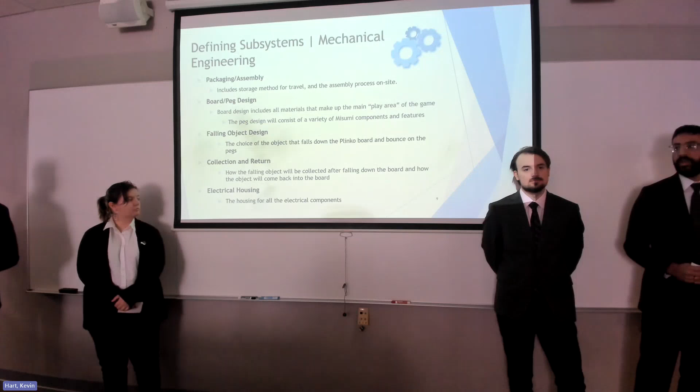The falling object design is essentially the choice of the falling object that is dropped along the Plinko board and bounces along the pegs. Collection and return is how the falling object will be collected after reaching the bottom of the board and how it will return back into the board for automatic play. And the electrical housing is just the housing for the electrical components that will be used.

Now, under the overall project objectives and constraints, there were several constraints that Misumi required of us, mainly being the project shall mainly comprise of Misumi components. Project shall not exceed spending limit of $2,000 for Misumi related components, and project shall not exceed spending limit of $1,000 for non-Misumi components. The project shall also include an automatic and manual game version. Project shall include a falling element dropped through a series of Misumi components.

Next, we formulated objectives and constraints pertaining to each specific subsystem. For UI, the design should have a switch to toggle the Plinko machine on and off. The design should have a button to switch from automatic to manual mode. The design should incorporate a screen to display helpful information to the user. The design shall not require more than 18 I/O pins. The design shall not draw more than 0.5 amps while in operation, and the design shall be readable from a

distance of 10 feet. Moving on to the audio-visual subsystem, the design should react to stimulus from the user and the falling object. The design should incorporate multiple different colors, and the design should clearly indicate which basket the object lands in while in manual mode. The design shall not draw more than 2 amps at full brightness. The LED should be capable of displaying full RGB color, and the design shall not produce more than 1,000 lumens or 80 decibels, because that would be a little annoying.

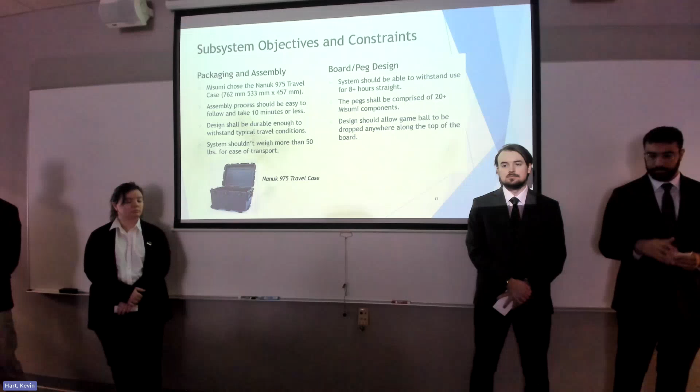Now moving on to the objectives and constraints for my subsystems. First off, we've got packaging and assembly. Misumi chose the Nanuk 975 travel case with the dimensions listed on the screen. You can also see the picture down below. The assembly process should be easy to follow and should take no more than 10 minutes. The design shall be durable enough to withstand typical travel conditions while in the travel case, and the system should not weigh more than 50 pounds for ease of travel.

Now moving on to the board and peg design. The system should be able to withstand use for 8 or more hours straight, simulating what a trade show or convention would be like. The pegs shall be comprised of 20 or more Misumi components, and the design should allow the game ball to be dropped from anywhere along the top of the board, providing a more immersive user experience.

For objectives and constraints for my subsystems, the falling object should weigh less than 0.5 pounds, should have a volume of less than 5 cubic inches, withstand an impact of 0.2 foot-pounds, shall include the Misumi logo, and shall fit into the collection and return system.

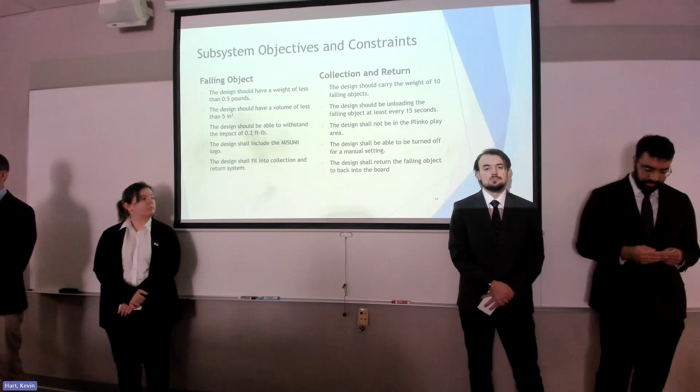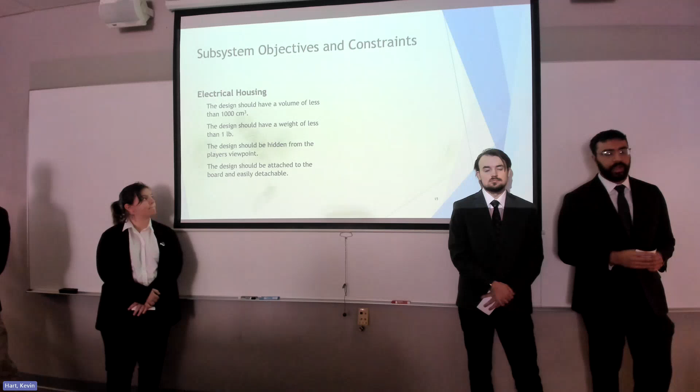For the collection and return, it should be able to carry the weight of 10 falling objects, should be unloading an object every 15 seconds or so, shall not be in the Plinko play area, shall be able to be turned off for a manual setting, and shall return the object back into the Plinko board. For the electrical housing, it should have a volume less than 1,000 cubic centimeters, weigh less than 1 pound, be hidden from the player's viewpoint, be attached to the board, and should be easily detachable.

So now we have some objectives and constraints set up, we can find some initial design concepts. Initial design concepts for the display focused on readability, character size, power consumption, and cost. Three main solutions were considered here: the Hub 75 LED matrix, a Focus LCD panel, or a 14-segment display from Cirqua in an array. As for buttons and switches, the focus was appearance, reliability, and cost.

Visual design concepts valued customizability, brightness, and power consumption, which led us to the Fit 0810 LED strip, single color, the NeoPixel LED strip, which is RGB and fully programmable, and the NE-IL IO signal beacon. And this beacon is really nice because it actually offers different colors and sounds, which is kind of a consolidation of both audio and visual.

Moving on to down selection, we decided to go with the Hub 75 RGB LED matrix because it was the most customizable by far, and it was able to be sourced cheaply from MSOE Tech Support at a discount. The LCD panel was eliminated because it just wasn't a good display. You couldn't see it from good angles and it wasn't very bright.

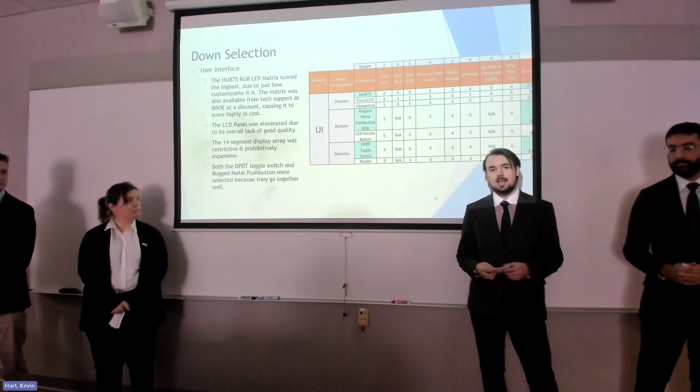And the 14-segment display was prohibitively expensive and also restricts the total number of characters and types of characters you can display. The DPDT toggle switch and rugged metal push button were selected together because they go together well and their metal fabrication makes them reliable and durable.

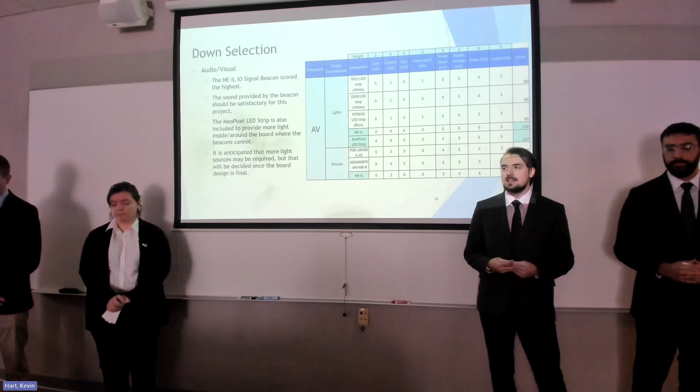Onto the audio visual down selection, we decided on going with the NE-IL IO signal beacon as the aforementioned combination of the audio portion, the buzzer, and the visual portion of the actual light up beacon. It was just really nice. And those would be kind of outside of the board. So I also went with the NeoPixel LED strip to kind of give light around and inside the board as well.

Moving on to electrical hardware, Misumi sold sensors took priority over other brands. Preferably, the sensors should sense when and where an object moves past them or be small enough to be placed in each well. The microcontrollers considered were based on cost, familiarity of coding environment, memory storage, and the amount of GPIO pins. As for power, the input will be 120 volt AC as a baseline, stepped down to at least 3.3 volts and 5 volts for peripheral microcontrollers, and it must be reliable, no voltage drop or current drop.

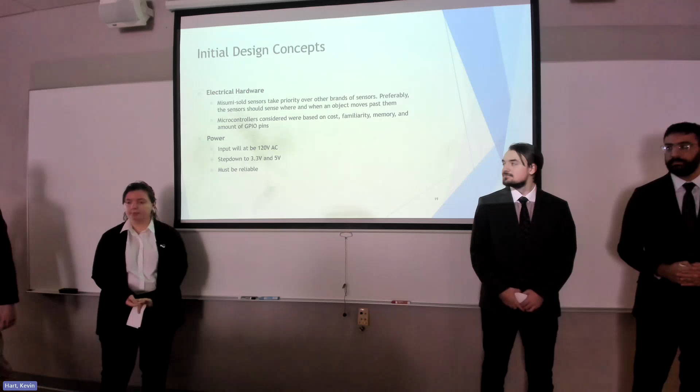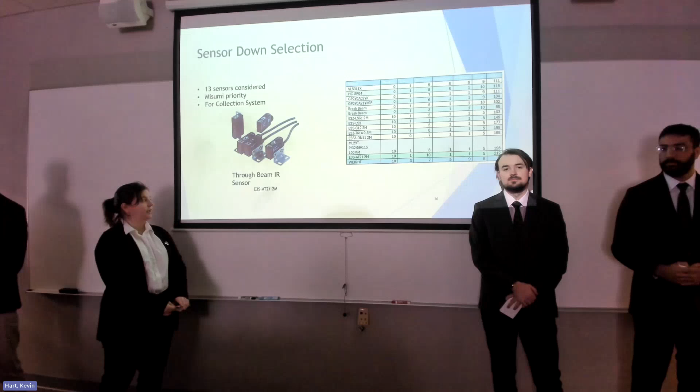As for the sensor down selection, 13 sensors were considered, 6 of which were non-Misumi and 7 of which were. Misumi took priority as they are our sponsor, and this was specifically for the collection system. And at the end, the through beam IR sensor was chosen for this project.

As for the microcontroller down selection, 3 major microcontrollers were considered. We have Raspberry Pi 4 Model B as our winner, given its customizability, the room for growth, and it has multi-cores. It also has access to RGB matrix hat and RTC, so it provides power and configuration for the RGB LED matrix display that we have already chosen.

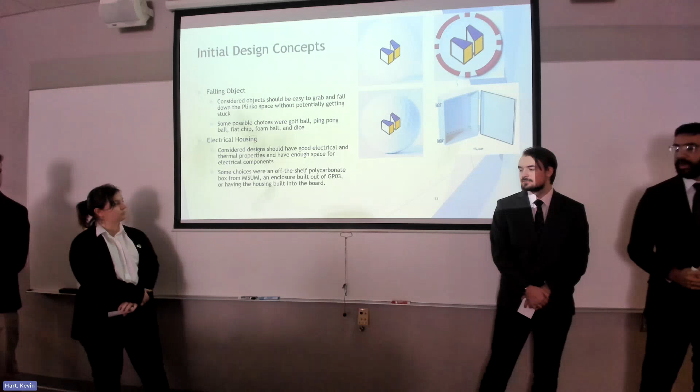For initial design concepts of the falling object, it needs to be easily grabbable, and it should fall down the Plinko board without potentially getting stuck. Some choices were a golf ball, ping pong ball, a flat chip, a foam ball, and the dice. For electrical housing, it should have good electrical and thermal properties, and have enough space for the electrical components to fit in. Some of the choices were an off-the-shelf polycarbonate box from Misumi, a GPO3 housing, and building the electrical housing into the board itself.

So for the falling object design down selection, the weight, durability, size, customization, cost, coefficient of restitution, and the ease of return were considered. The golf ball ended up winning because it's durable, so it won't be damaged by the pegs when it's falling down. Ease of return, because the spherical shape makes it easy for collection and return. And coefficient of restitution makes the golf ball a good bouncing candidate for a good enjoyable Plinko game.

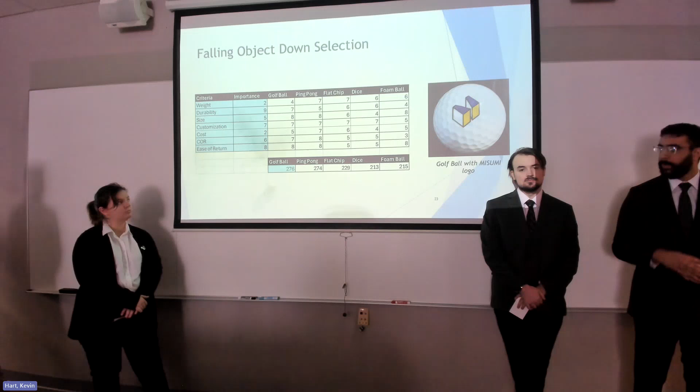For electrical housing, considerations were cost, machining, use of Misumi components, thermal and electrical properties. The polycarbonate plastic box from Misumi ended up winning because it is from Misumi, our sponsor, and it has good electrical and thermal properties. And it's already off the shelf, so that makes it a good choice.

For the initial design concepts of collection and return, it needs to be something that can put a falling object back into the Plinko board with good upward motion. So some of the initial concepts were a flat belt elevator, a chain elevator, and the Archimedes screw.

So some of the considerations were cost, space, ease of build, connection to a lifting element, and the speed that's available. So the chain elevator ended up winning because it has good speed available from the motor, and the connection to a lifting element is fairly easy because of the connecting link with brackets that can attach a lifting element to it, and it's fairly easy to build. So the chain elevator is the one we went for.

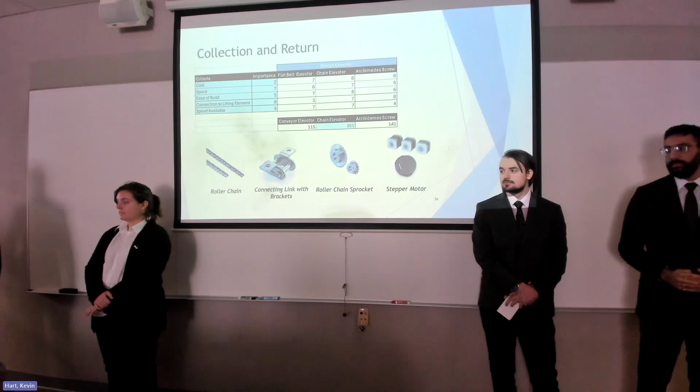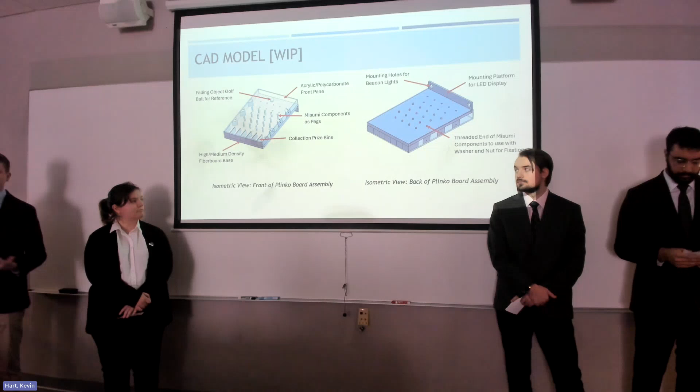Now moving over to the right side, you can see the back of the Plinko board. On the top there, you can see we've got a mounting platform for the LED display. You've also got some holes in it, which will be able to mount those beacon lights. And you might also be able to see that the threaded end of the Misumi components stick through the back of the board. This will be used as the main fixation device since we will use that with a washer and a nut to secure the components onto the board.

The CAD model for the lifting assembly and housing is mainly contained on the back of the board. For the collection system, there will be a ramp at the bottom of the Plinko board that'll be rolling golf balls into a collection area for holding. The return system includes a stepper motor that'll attach to a roller chain sprocket. The roller chain will be wrapped around it and also around an idler sprocket above.

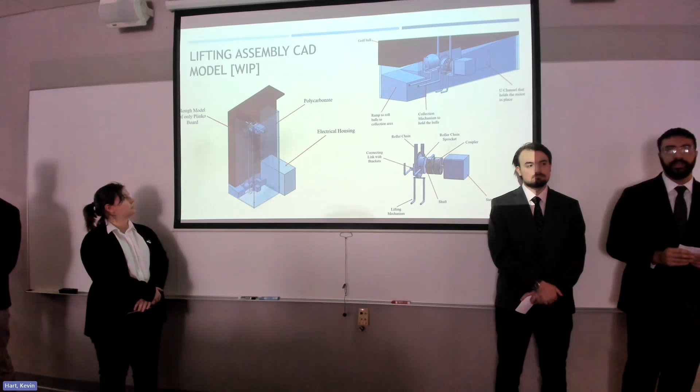And as the motor rotates, throughout the chain, there's connecting links and a lifting element. Then as the chain rotates, the lifting element will pass through the collection area to lift the golf ball up and eventually drop the golf ball into a ramp that'll lead into the Plinko board.

So now for some of the future CAD progress that I was mentioning earlier, we need to combine that main Plinko board model with the collection and return model, which will give us a good overview of the entire system. We also need to configure the arrangement for the IR sensors since they're just kind of thrown in there at the moment, which will likely require blocking off a collection bin or two to be able to fit these sensors into the board. We also need to add the audio and visual components, such as the light beacons and the speakers.

Aside from the mechanical components for this project, we will also be working in a simulation environment so we can code the IR sensors, the audio-visual components, and the user interface. We will be working on the Raspberry Pi 4B, which is a fully fledged computer, and two IDEs are already installed. We have Python Thonny and C++ Geany. This is going to be our language of choice, as embedded C is what we are taught here at SOE.

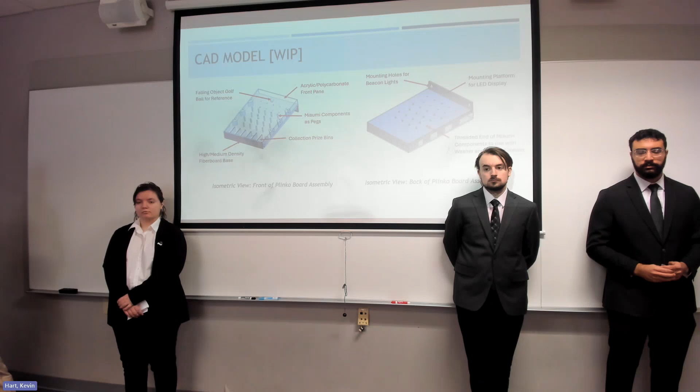Okay, we've got to move on to the next talk. Let's thank this group. Good job, guys. We have another Misumi talk.

Got it. Okay, so we've got one more talk, Misumi Fun Games. This one is a pinball machine. So go ahead, take it away, guys. 20 minutes of talk and 5 minutes Q&A. So this is going to be our design of a Misumi pinball machine. I'm Riley. I'm Luke. I'm Sam Last. I'm Samuel Bone. And then I'm Scott.

So for the project proposal and constraints, we were tasked with designing and building a tabletop trade show demonstration unit that utilizes both motion and a large number of Misumi components to catch the eye of trade show attendees. A couple different constraints that we had: originally, the size envelope was going to be 600 by 350 by 300 millimeters, but that was changed to fit into a Nanuk 975 travel case, which is 762 by 533 by 457 millimeters. For power, it was going to be a 120 volt standard AC outlet or battery power which lasts up to 8 hours.

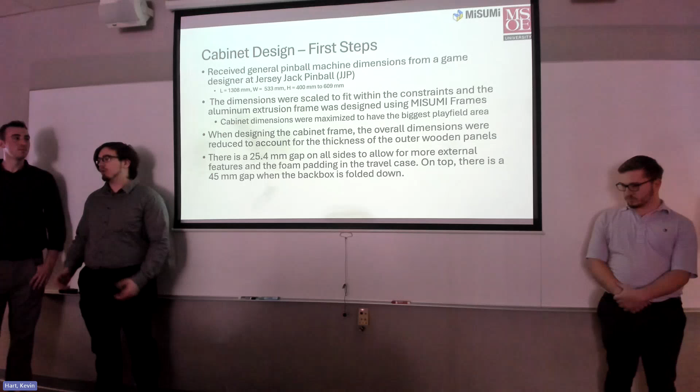So for our first steps in our cabinet design, we actually got our general pinball dimensions, our usual pinball machine, from our industry contact at Jersey Jack Pinball. And then we scaled those dimensions down to fit within the constraints that we had. And we also maximized those dimensions. We want to maximize the playfield dimensions to have the most fun that we can get out of the machine.

And when we were maximizing those dimensions, we accounted for the wooden panels on the side and then left about an inch gap or 25.4 millimeters on all sides and a little bit more on the top so that we can have room for any external features and for any foam packing inside of the travel case.

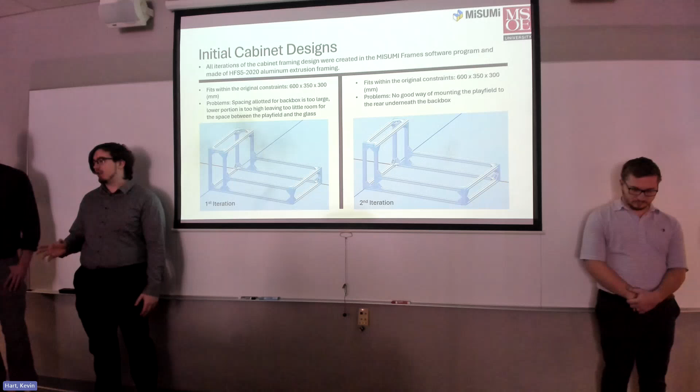So for our first cabinet design for the framing, we used the Misumi frame software. We used their HFS5 2020 extrusion framing. It's 20 millimeters by 20 millimeters. Our original design, the height here was a little bit too tall. It didn't leave enough room for the playfield. The playfield would stretch from there to there about, and the height we would get for the playfield was too short, so we needed to lower that.

And then the width of the back box is actually on a slant as it goes down. It's kind of a trapezoid shape. And this original dimension was scaled from a real back box, but that was off of the top dimension. So this was too long and it actually ended up being short. So for our second iteration, we shortened both of those dimensions so that would work out.

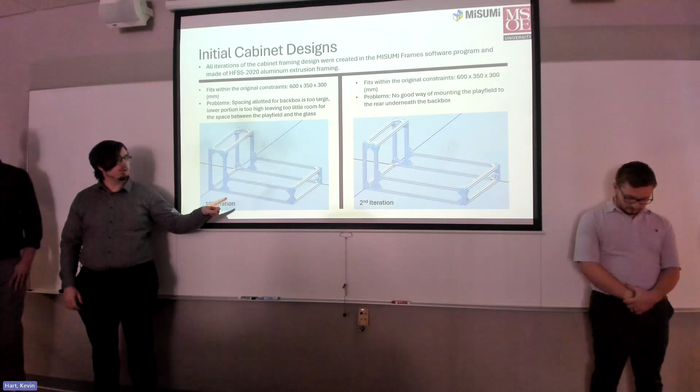And then for our third and final iteration of the framing, we removed 2 posts so that we could extend the playfield longer, we get a couple more inches of the playfield, so it goes beneath the back box. And then we added a bar in the back for ease of mounting the playfield onto the frame.

We then exported the framing into SolidWorks and we added the wood panels, we added the hinges. The back box rotates off of this. That's in the open position. There's a cam lock in the back that holds it in the open position. And we added the metal side trim here, which will screw on.

And we have the playfield glass, and there's actually plastic trim in there, which is what the playfield glass is actually touching, so it does not get scratched. And then the apron will be added and a lock bar at the bottom to hold the playfield glass in, and those will be fairly easily removable if you ever need to take out the playfield glass.

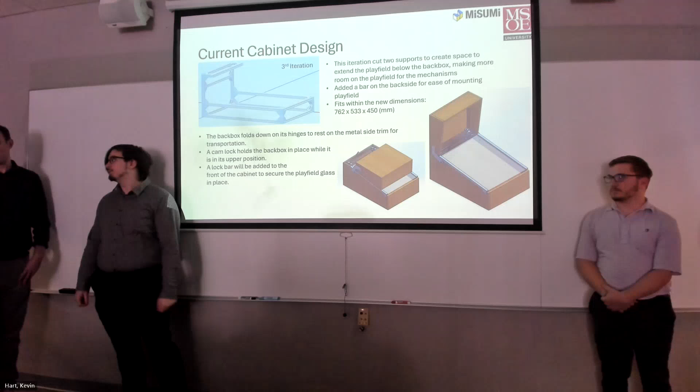And then for our custom parts, we use Meviy through Misumi. You can just upload a CAD model, and those parts can be made through processes such as CNC milling or modifying the sheet metal. Those parts that we're making through Meviy are going to be the hinges, the side trim, and the lock bar once it's designed, and then the ramp structure for the playfield, and then the apron.

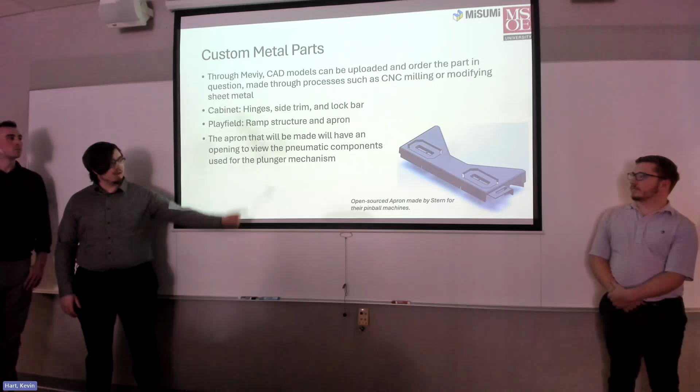The apron, once we design it, will have an opening so that we can view the pneumatic components for the plunger mechanism to launch the ball. And then that is an open sourced apron just as a reference picture.

So during the cabinet design, we're also thinking about playfield design and what kind of theme we want for the game. So we decided to go with an MSOE theme focused on Roscoe Raider. So because of the connection with MSOE, we got in contact with marketing to make sure that the game meets what MSOE wants, and also get creative help with the artwork for the cabinet and the playfield.

And one of the requirements that the creative director gave us was to connect each major component that we had previously selected back into the theme. So the theme starts with the player who finds themselves out at sea when they come across Roscoe Raider and a ship full of treasure.

And then after the ship is sunk, the goal for the players is to collect as much of Roscoe's treasure and his materials as they can. And in order to do that, they have a 3-minute time limit, because that's the amount of oxygen that they have. And at the end of the 3 minutes, they need to either return to the surface or they'll drown.

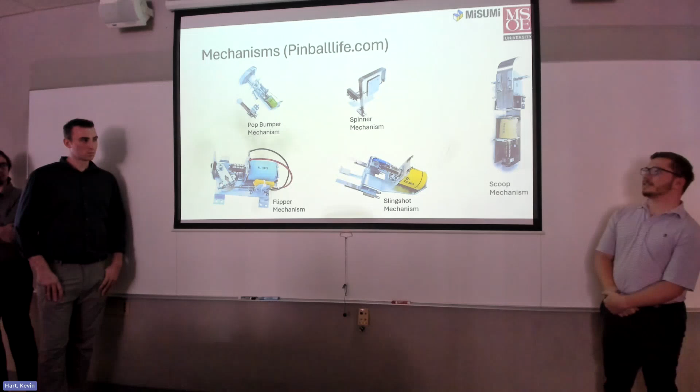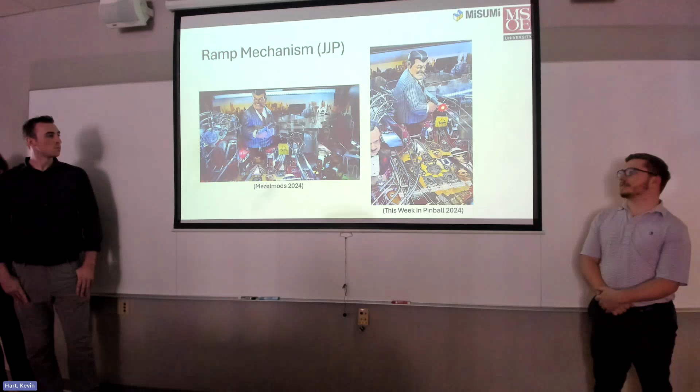And then the ramp mechanism we bought from Jersey Jack Pinball. You can see it here featured in The Godfather. On the left, in the circle, you can see the ramp when it's in the down position, and on the right, you can see when it's up. So when it's up, it allows for the ball to travel underneath the ramp, and it also allows for another path to a wire or return ramp.

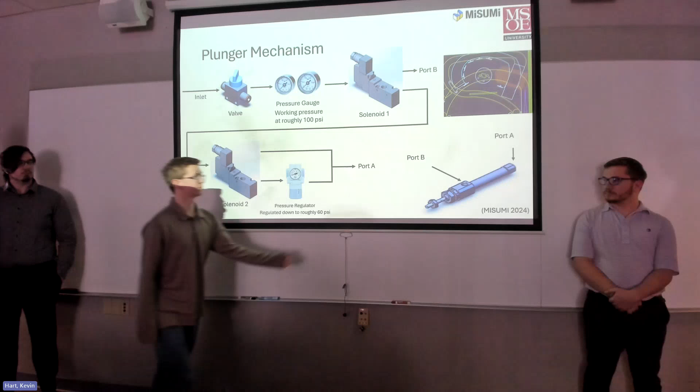All right, for the plunger mechanism, we're planning to use a pneumatic piston to shoot the ball out. So we're starting off with a solenoid just to actuate the pneumatic piston, and then we're also going to use another solenoid to regulate the pressure. So it'll have two different shots with this solenoid. One, when the ramp's down at the beginning of the game, the ball will just fall down. And when the ramp is up for a multi-ball, we'll use the higher pressure to make sure that the pinball can make it all the way around the ring.

And then there's the rest of the diagram, the piston that we plan to use. Here's the calculations that we used to get the volume of the piston. This is what we used to get the volume of the tank that we need and how long the compressor is going to have to run for.

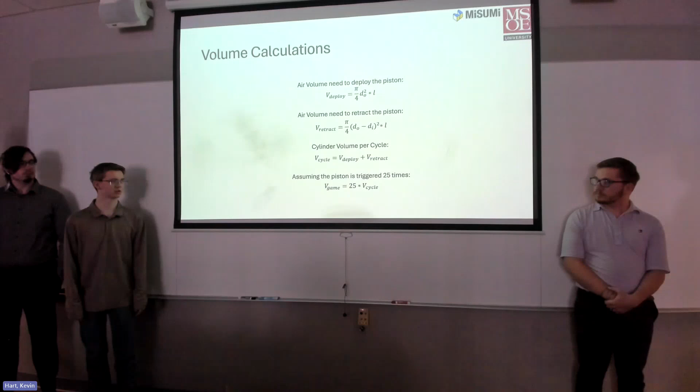Then here's a linear actuator or lead screw that we're using to move the Roscoe Raider back and forth. We're working with marketing to get that figurine that we're going to use. And it'll just move back and forth there.

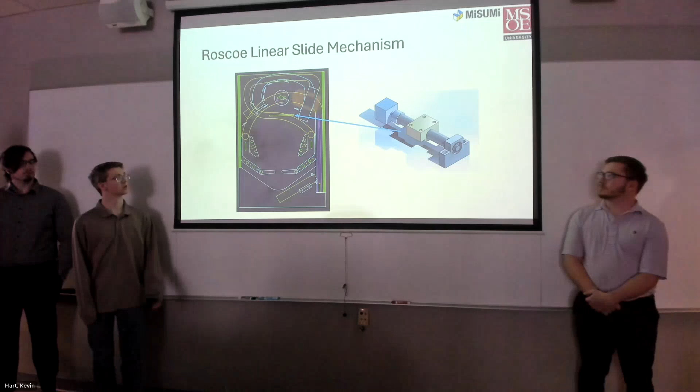So then for the hardware circuitry design, we have just a couple of main requirements that we want. So first, we need some sort of controller board to interface with all the peripherals, which we are going to be choosing. We'll go forward with that. And we're also going to need some driver boards that control high voltage components.

And then to fit with one of the constraints that Misumi gave us, we need a power supply that runs off a 120 volt AC standard wall outlet, which for our case, we're going to be choosing a 48 volt power supply from Misumi to utilize all the high voltage components, because the flippers and the slingshots all have a maximum voltage rating of 50 volts. So that's as close as we're getting to that.

And then additionally, we wanted to have some sort of main programming language that we teach at MSOE, so either embedded C or C++ or Python. So there were two different choices that we were going with. First, an Arduino microcontroller with additional circuitry, or the FAST pinball architecture.

So some of the pros between those two: for the FAST architecture, it has good documentation across all of its website with wiring together components and coding together. And it's widely used across homebrew pinball machines, so there's tons of tutorials available online on YouTube or websites.

And it essentially has a plug and code kind of mentality where all the driver boards and circuitry are already designed for you, and you just have to plug it in, and basically you just code all of the different aspects of it, which makes it easier for driving those higher voltage MOSFET switches.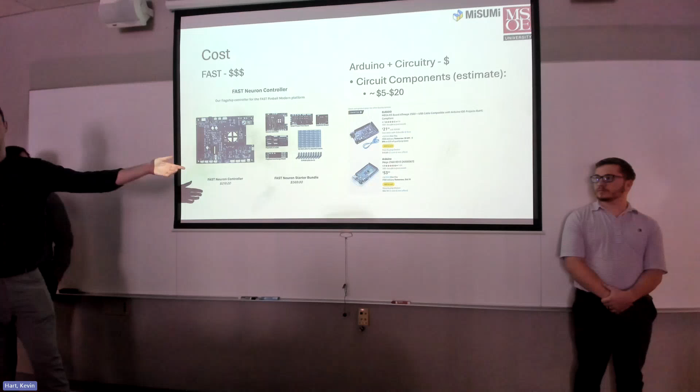So here we can see a little bit of the cost. As you can see, the FAST is almost $600 for everything that we would need. Whereas with an Arduino, if we build our own PCB, you can get an Arduino for around $50 off Amazon, and circuit components could be anywhere between $5 to $20. So we decided to go with the Arduino and circuitry.

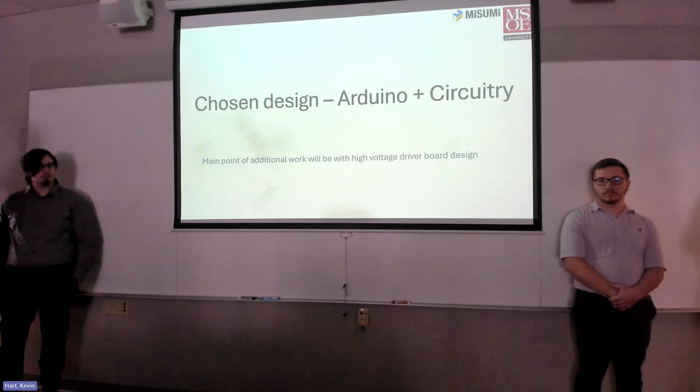So for the MOSFET component selection in that future PCB board, we will need a voltage rating of greater than 48 volts to accommodate the power supply. And we also wanted a current rating of around 12 amps, because we measured the resistance of some of those mechanisms as around 4 ohms, which I don't think is going to be accurate, because from outside research, most pinball machines only draw between 2.5 to 3 amps.

So I definitely need to test that going forward when we actually receive the power supply to see how much current it really will draw. But just to make sure there are no issues with that, I selected a MOSFET that has a maximum current of 30 amps, so it should be totally fine in that regard.

And it also has a drain to source voltage maximum of 75 volts, which is almost double what we really need. And then the gate driving voltage is 4.5 volts, and the Arduino that we're going to be using, the Arduino Mega, has a driving voltage of either 3.3 or 5 volts. So if anything, we could just add a resistor to slightly decrease that gate voltage. So there's 2 devices.

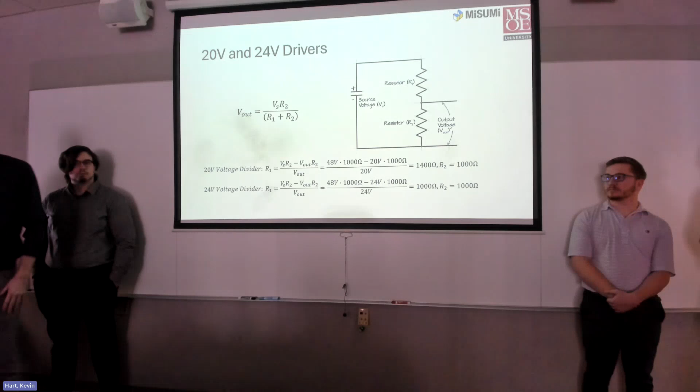Now going into the software section for our pinball machine. It'll be a C-based state machine that is interrupt driven, and it's going to be simplistic for speed, since our game is highly dependent on timing for our board components. It's going to be predictable for the player.

So we start out with the initial setup to initialize all board components, and then transition to the idle state to wait for the player to start the game, where all sensors and components are locked, so no interrupt scoring or unwanted actions occur before starting. And then once the player starts the game, it'll start the main game loop and the start timer of 3 minutes. And in the game loop, it'll allow interrupts to be fired.

And once an interrupt is fired, it'll perform a game function related to the sensors or other game components. And it'll update the score if need be, or reset the game object as need be. And after that, it'll clear any interrupt flags and transition back into the game loop. And after the 3-minute timer is up, it'll go into the end game to display the final scoring.

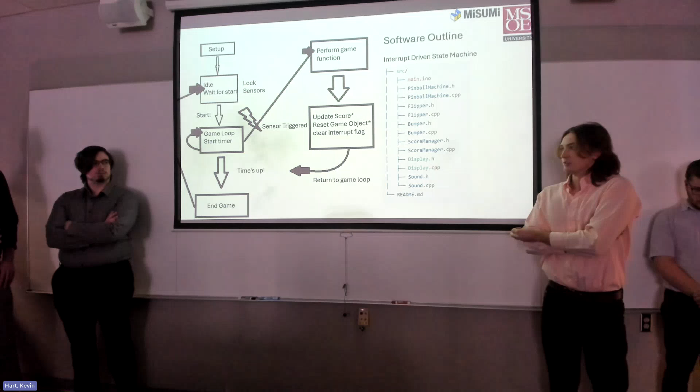In our main program loop, the timer is displayed on a 7-segment display for the player, and the light show on the game board will be influenced by game operations to communicate to the player how their game's going, along with sound effects to communicate game status to the player, or based on timing or game actions to further engage the player. Sound effects will also communicate by relaying feedback to know main objectives in the game and which are good and bad.

Scoring will be a volatile global variable in memory, since it'll be changing a lot, and we can add safety to that so scoring does not get corrupted. It'll be updated through interrupts. Interrupts are good for our C-based programming, because they're very fast and won't heavily impact timing on our game board. And it'll be displayed for the player through a 7-segment display, and be very simplistic and interpretive for the player to know how to play and how their game is going if they've never played pinball before.

So going forward and kind of summarizing what we've done so far. This first semester, we had initial brainstorming of the playfield and the cabinet designs. Then we went about designing the cabinet and the playfield. And then a lot of that finished out with determining the main playfield components and component selection and such.

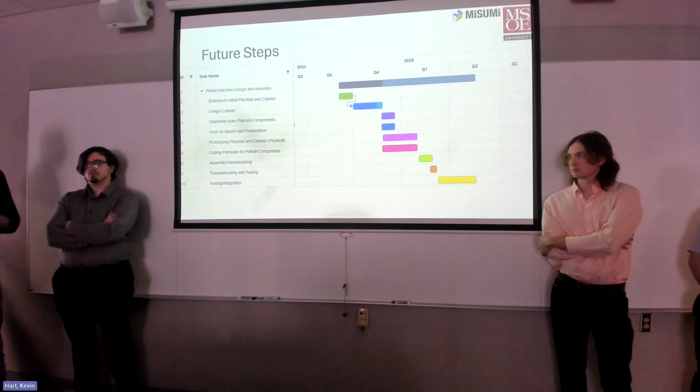And then during play testing, we'll have a variety of people with different skills play the game to determine how often the pneumatics are driven, to see how big the tank needs to be, and to also check for wear and any other bugs that we didn't account for in the initial design.

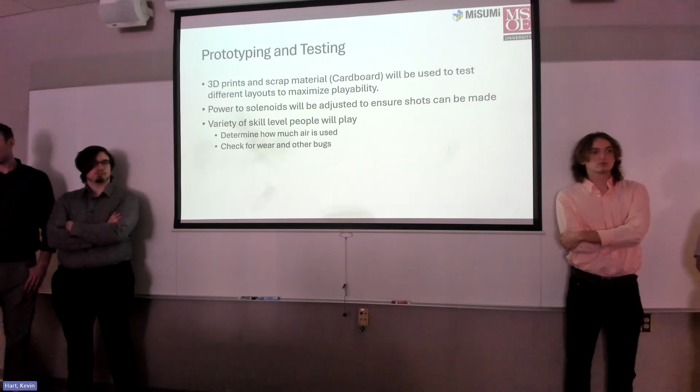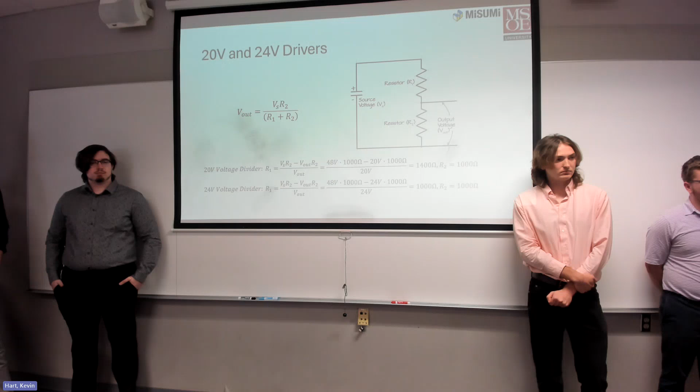And then the selection for the flippers, I wasn't sure I understood. So you picked that specific one because it could move any size pinball. Is that what you're saying, Gary? Yeah, so the solenoid on that has more power, so it rotates faster, right? Did you compare that to a pneumatic version at all, or not?

So you have some pneumatic components that are in this, yes? Yeah. So you're talking about some compressed air, right? Like using some of these. So how are you recharging that compressed air? Where are you getting your air from? We'll probably have an outboard compressor. Misumi probably provides. Okay. Yeah, they could have some. We're still in the works on where the tank is gonna go and what the compressor's gonna be. Is that common for pinball machines to have that? No, we're just gonna use as many Misumi parts as possible, that's our way to do it.

Cause I was thinking about this, I don't remember playing pinball and then all of a sudden hearing some compressor come on. This was one of the easiest ways to add more Misumi. As far as I know, there's not been a home brew pinball machine that uses pneumatics or anything. It's all electrical solenoids.

So the most up-to-date cab model, is that the one that you showed with the fold down situation? Is there a display on the top side and is there wiring going to that? How does the wiring work when you fold it down? There will be a display on the top part of the back box. So in the back box will be the display we mounted, and then there will be a plastic piece that locks in that shows more artwork.

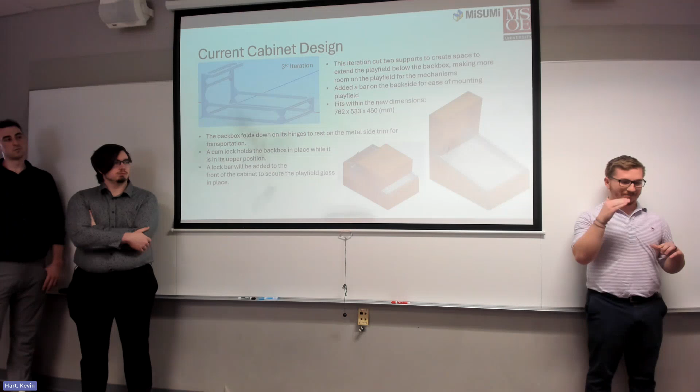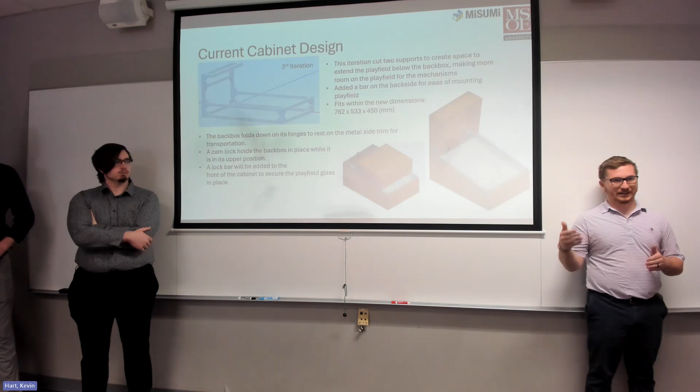Yeah. How do we communicate that story across without having a full page storyboard to go with it? Normally on a lot of games, on the apron down in the corner, they have just a little plaque with the main rule steps. And on that we probably wouldn't put as much detail as I put into it here. It would just be like light MSOE to qualify multiball, hit that. I'd encourage you to think about how we streamline that for consumers that are not familiar with it. Yeah, I could have made the whole playfield layout a lot more complicated, but it's already pretty complicated. I think you're plenty complicated.

All right, we gotta move on. Thanks, guys. Thanks, last, not least. Yeah, Ivan's, I think, one of the committee members here. Yeah. No, you're fine. No problem. No, thank you. Hey, you guys ready? Oh, sorry, come on in.

Okay, last talk in this session is kind of an educational talk, Stem to Stern. So 20 minutes of the talk, and then Q&A. Go ahead, guys. Today we're going to talk about the Stem to Stern teaching technology project brought to you by Dan Gonzalez.

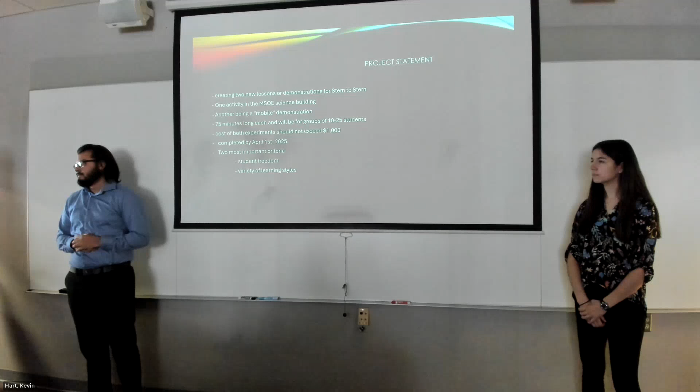All right, so now we're going to go into some background research. We're going to talk about what Stem to Stern is, the current state of the program, some learning styles and general learning concepts, and then some other psychological concepts that we want to try to integrate.

So what is Stem to Stern? Stem to Stern is an educational program created by Rachel Hunter and Will Bott to provide a STEM education and rowing experience to underprivileged children. There's over 20 different locations that serve kids from middle school to late high school. Here at MSOE, it takes place in the STEM Center, and we teach middle school students. They do sessions once per week for 6 weeks, and they have 3 of those blocks per year.

Before the lesson, it takes about 45 minutes. They have a snack, do an icebreaker, try to release some tension because it's an after-school program. Then they go on to a lesson, and then an activity. The lessons take 10 to 20 minutes. It can't be too long because the children get a little rambunctious; they have high energy. The activity afterwards is more geared towards design and supplements the lesson. The kids ask lots of questions during the lesson, at least from what we saw. They're pretty engaged, and the lesson should be informal, engaging with the students. It's a definite benefit.

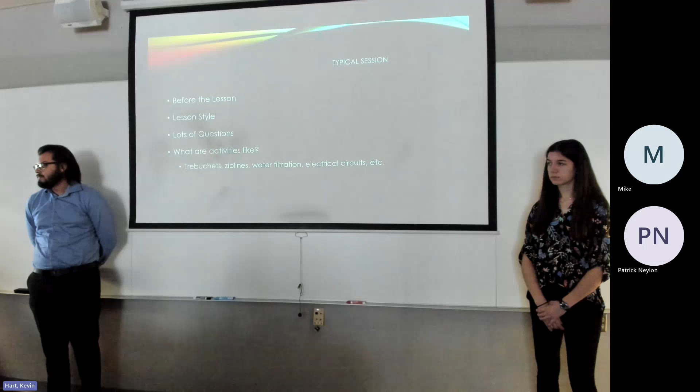So most of our learning research was geared towards the lesson design rather than the activity design, but we did incorporate some of these concepts into our criteria. So the first one was learning styles. That's just where we started because that's the first thing we thought of. Learning style is just the type of information you'd like to learn from. There's 3 types: visual, auditory, and kinesthetic. Those are the 3 at least we focused on, and we found pretty quickly that there's no model that can predict what kind of learning style someone has, because it's purely preference based.

So going along with that, tailoring a lesson to someone's learning style doesn't actually help them learn it any better, contrary to common belief. Instead, having all 3 of them in a lesson or tailoring the learning method or the learning style to the actual content is more important than tailoring the learning style to the person.

Cognitive styles are a bit different. They're more about the inner workings of a person. They are about how a person thinks, solves problems, and remembers information. They can be predicted using models, empirical models, and tailoring the lesson to someone's cognitive style does improve learning. So the difference between them is that learning style is more about how information is presented, and cognitive style is more about the inner workings of the mind.

Next, we looked into cognitive loading, which is the total effort taken by the brain to learn something new. There's 3 different types. There's intrinsic, which has to do with bridging the gap between previously known information and the new information. There's extraneous, which has to do with discerning which information is important. And then the third one is germane, which is most associated with learning achievement. The higher the germane load is, the more of an achievement there is. So add them all together, you have your total cognitive load, and try to keep it kind of low because everybody's kind of got a threshold.

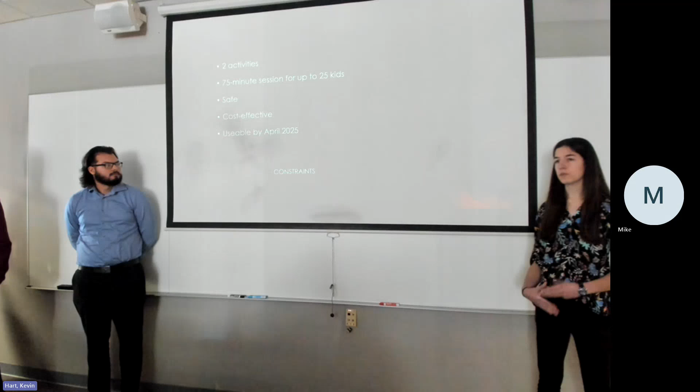So starting with the constraints, you can see them outlined here. Our objective was to create 2 activities for the students, one taking place in an MSOE lab to expose them to that kind of environment, and then one that will be transportable or mobile, as there's over 20 locations nationally, so that they could take this to a different Stem to Stern location. Next, each session we have 75 minutes with the students, and we're planning for up to 25 students. So that plays more into our budget because we want to maximize the interaction each student can have with the activity.

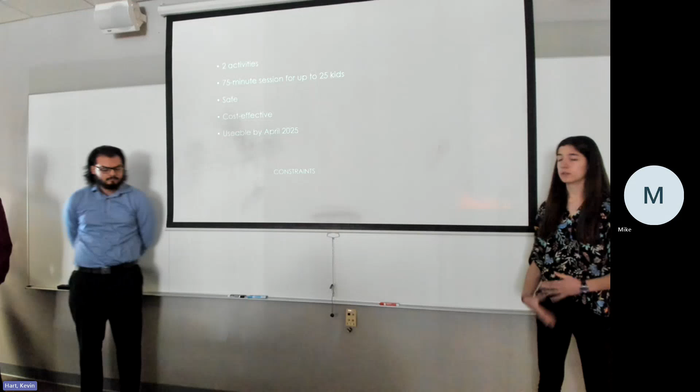Next, and most importantly, safety is a top priority for us. We're going to introduce any necessary lab protocol to the students, along with design experiments with safety built into them. Continuing, our experiments should be cost effective. We have a budget of $1,000, which is kind of flexible, but ideally we'd like to stay under that. And then finally, both experiments should be usable by the beginning of April, as that's when the session with the students will actually take place.

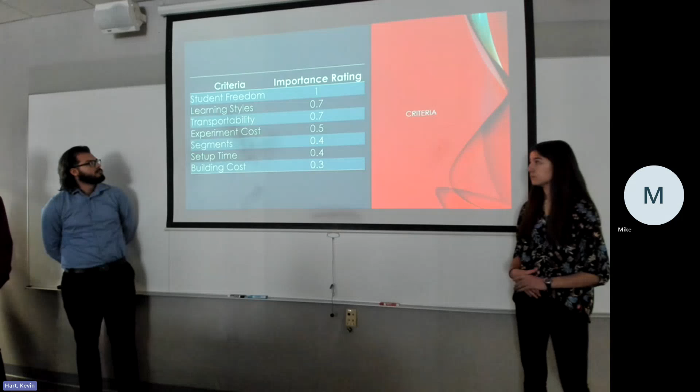And next, you can see our criteria outlined, comparing importance relatively among them. First of all, student freedom has the most importance as our experiments are focused on students. This is supported by the metacognitive scaffolding that we discussed earlier. And we want to make sure that students can take ownership and experiment with the different activities so that they can learn through doing. Next, we have learning styles. There's over 30 out there, but we focused on auditory, visual, and kinesthetic, which we hope to include all pretty equally so that every student feels engaged. And we thought that was really important.

Next, transportability, that's the mobile aspect, which was also fairly important as Stem to Stern requested that, and we thought it was something nice that we could do. Continuing, experiment cost was moderately important. This is the cost that Stem to Stern will have to pay out of budget to run the experiment every time. So we have to account for any components that might be broken on accident or on purpose. So we would like to minimize that.

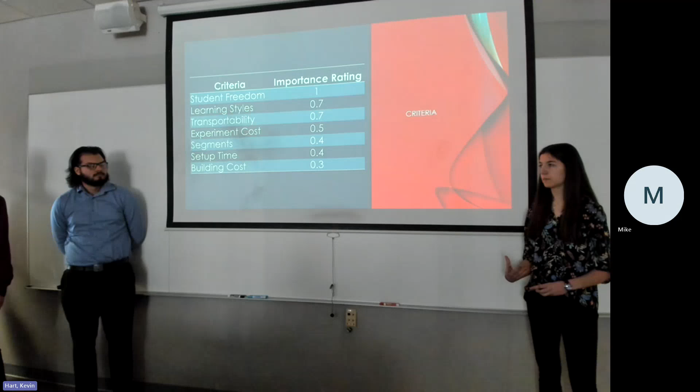Just continuing, segments: this is how each session will kind of be structured. We want to include theory, video, building, measure, and analysis segments. The theory will kind of introduce any equations and calculations that are prerequisite for the activity. And the video will kind of supplement that too. And then the building segment will take the longest amount of time. It'll be very hands-on, to try and keep the students engaged. And then the measure and analysis segments will kind of summarize what they did, compare the calculations and the actual experimental values. And we thought it was important to have around 5 segments just so they're not doing the same thing for a long amount of time, just to keep them engaged.

Next up, we have setup time. This is the time that either us and/or the STEM staff will have to take to set up the experiment. So this is moderately important, but it doesn't directly impact the students. So it's more of a convenience for us. And then finally, the building costs. That's kind of the same constraint mentioned before. We can always file for a grant for more money, so it's not super complicated, which is why we rated it so low.

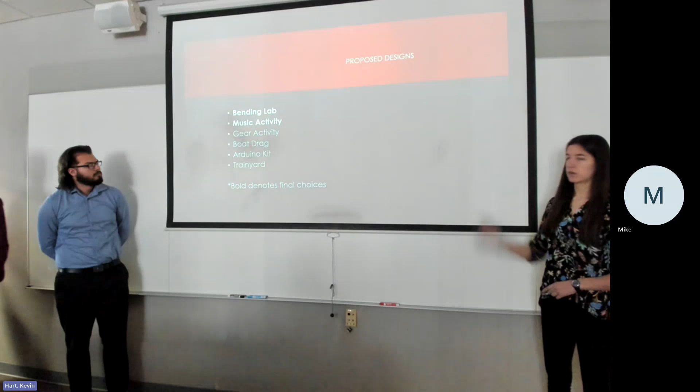And then here are just 6 of our designs that we chose to develop a little further before comparing. As you can see, the first 2 bolded ones are our final choices. And the next slides will kind of go through an overview, a design, what the lesson plan might look like, and an estimated cost.

So one of the activities that was chosen was a bending lab activity. This activity is designed to introduce students to stress and material strength. This has parallels to the activity that STEM already included the kids in, which is rowing, because during rowing, an oar would experience bending.

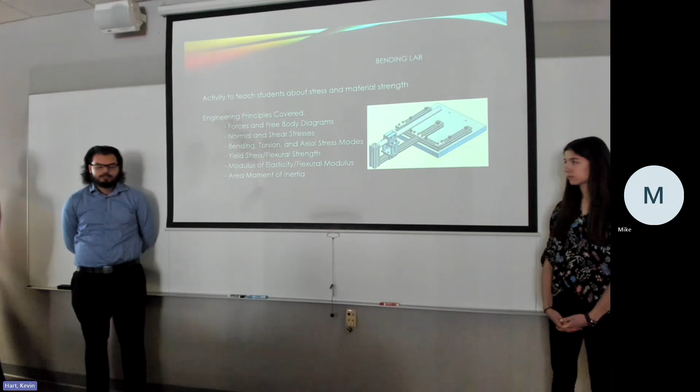So some engineering principles covered in this activity would be forces and free body diagrams, normal and shear stresses, bending, torsion, and axial stress modes, as well as some yield stress, flexural strength, modulus of elasticity, some flexural modulus, as well as the area moments of inertia.

Some key design features for this activity are a sliding mechanism that allows the moment arm to vary, and a wood specimen, which was chosen due to its low cost and ease of replacement, but also its relatively weak properties, as well as it being compatible with the mechanics lab force fixture in the MSOE mechanics lab.

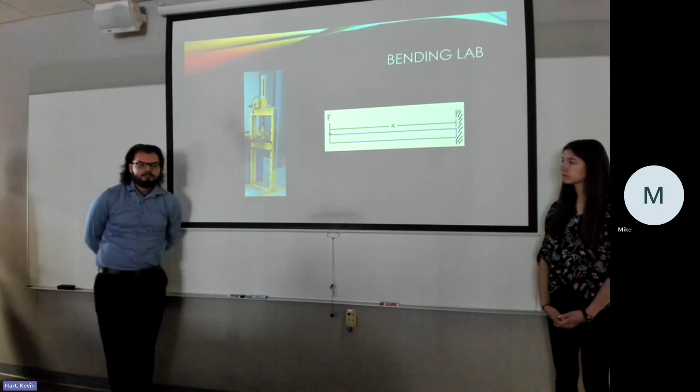Here's a simple free body diagram of the wood specimen. This force would be applied by the load frame that the students will be able to manipulate to achieve this force. And that length X will vary across, you can go to the next slide. That length X would be varied by this slider, which will be able to slide back and forth.

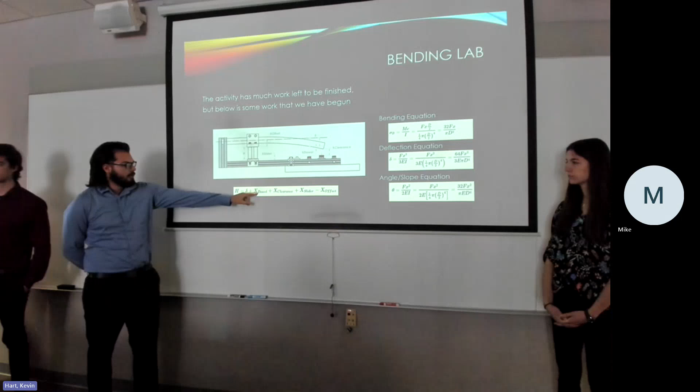So some work that has been done on this activity at the moment has been this spacer length, and this is quite important to determine because we want to prevent interference between the dowel and this center bolt. So to determine this spacer length, we developed this equation, which takes into account all of those heights. And using those equations of bending, deflection, as well as the angle slope equation, we were able to calculate the deflection and the XL, and these other ones were sort of based off of the CAD model.

Some student objectives for the bending lab would be that the students would be able to choose a force and length value from an array such as this. They will then conduct a pre-experiment analysis using the equations taught in the theory segment to see if the beam will yield or not. They will then conduct the experiment and do a post-experiment analysis to validate their initial expectations or correct any mistakes.

The initial cost estimate for the first iteration for 2 test benches was $585. Our second iteration brought it down to $379.

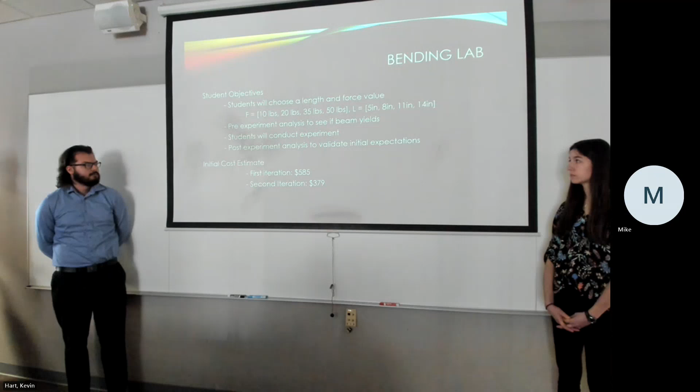Next up, we have the music activity. The current group of students at STEM is very musically inclined, and we thought it'd be cool to combine physics and sound for the students. A lesson might introduce the theory of waves, different aspects of sound, frequency, and wavelength, and we're going to focus on stringed instruments in particular.

And then here you can see our concept. So the objective for the students is going to be to produce a certain note. So we'll help them figure out what frequency that corresponds to. And they'll be able to do this by adjusting the weight hanging over the pulley. This will increase or decrease the tension in the string. And they will also be able to change the length of the string.

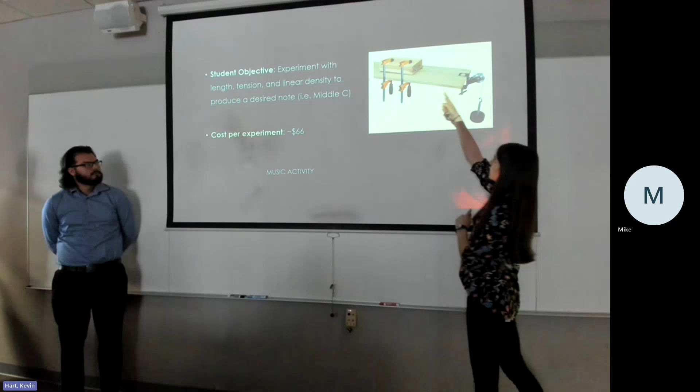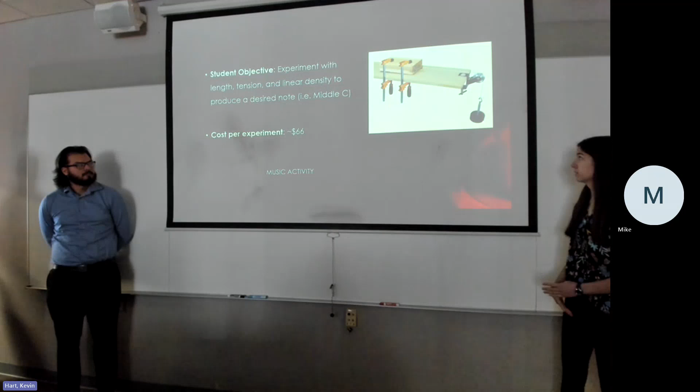And this experiment is pretty straightforward. The students obviously have some experience with sound, so there's a lot of parallels there. We estimated one experiment to cost about $70, so we hope to make at least 5 to increase every student's interaction with the experiment.

So the next 4 activities were activities that were not developed further due to being eliminated during our decision process. One of them being the boat drag activity, which was designed to showcase drag forces. Engineering principles that would have been covered would have been forces, free body diagrams, buoyancy, and spring mechanics, as well as some statics. Some key design features for this design would have been a tank of water with a submersible pump to simulate current flow.

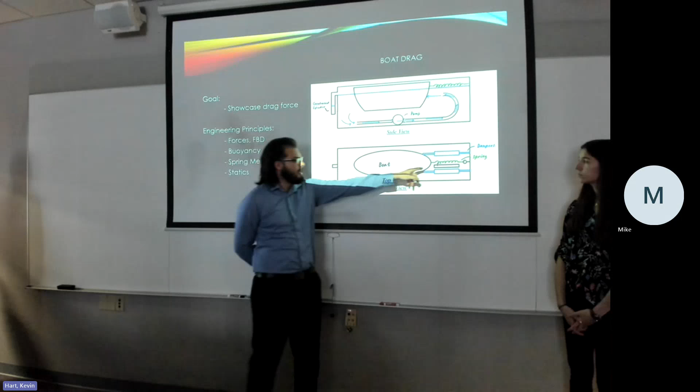The boat would have been attached to the tank via a spring, which would allow the students to directly measure the drag force. 2 dampers would have been installed next to the boat to prevent any rotation, as well as a graduated cylinder to collect water displaced by the boat, which would have been useful for calculating the buoyancy of the boat. Students would have been able to design their own boat using Legos or some type of 3D printed structure to allow for variation in that drag force.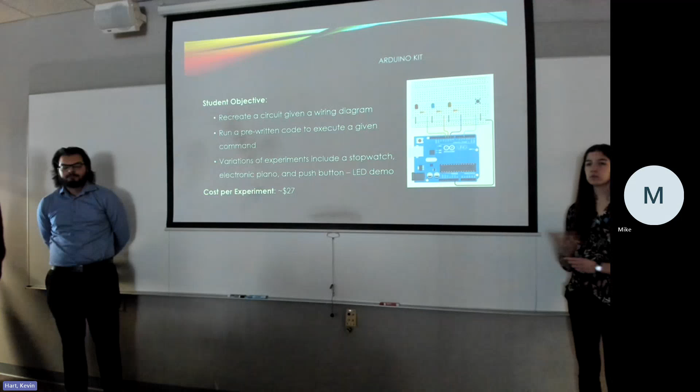And here's just a basic wiring diagram, actually from a lab here at MSOE, which is pretty cool. This illustrates some LEDs, resistors, and a push button. And we would give this to the students and have them replicate it along with a partially or completely made code that they can run.

Another idea that's more complex would be to make an electronic piano, just like one octave, which we thought would be pretty cool, but very involved. And because there's only a few components and we're going to be buying in bulk, the experiment was relatively cheap at $27 for one.

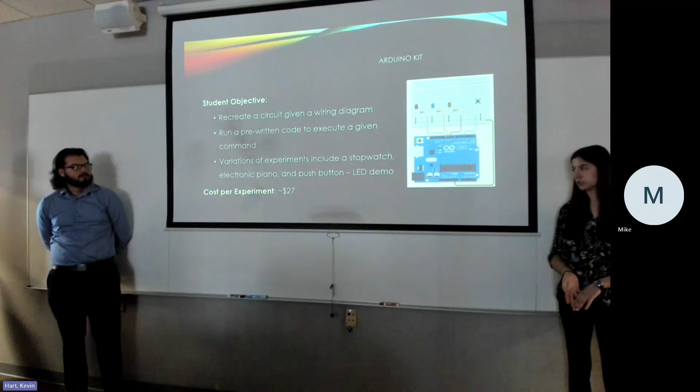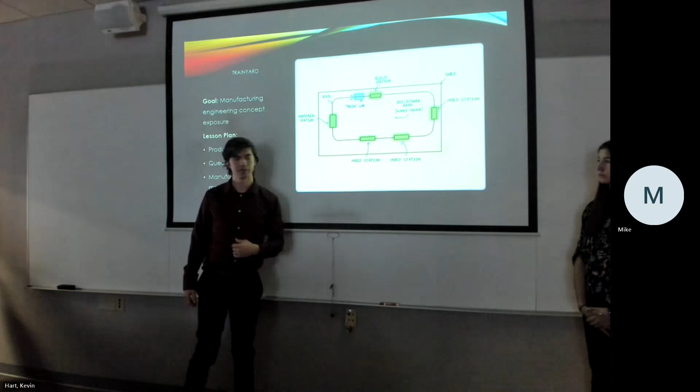The material station is responsible for depositing and sending material to the mold stations, and the mold stations are responsible for making the pieces that the building station needs to complete the final object. So this train car kind of runs between them, and they're only allowed to transport things using that train car. So the lesson may include production lines, some queuing models, and manufacturing methods.

So this is an example of what this molding station might look like. You'd have this mold chassis and then a swappable mold that you could switch out depending on which piece the builder needs. And then it would just be in this panini press looking thing where you put the Play-Doh in there, punch it down, and you have your shape, and you can set it on.

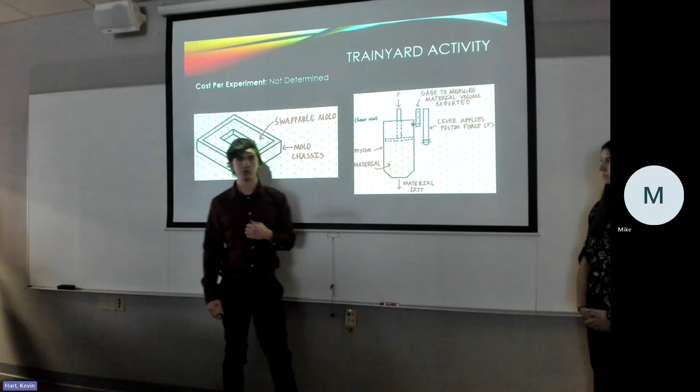So then your material station will have this piston filled with Play-Doh, and then you could pull down this lever, pushing the piston and extruding the material at the bottom. The material station will also have this gauge here so they can measure how much material they've extruded, and it would reset every time they put the lever back up. And these tick marks, there will only be a couple of them, but correspond to which mold pieces would be needed. So we could do the calculation to make sure they're all even interval with one another.

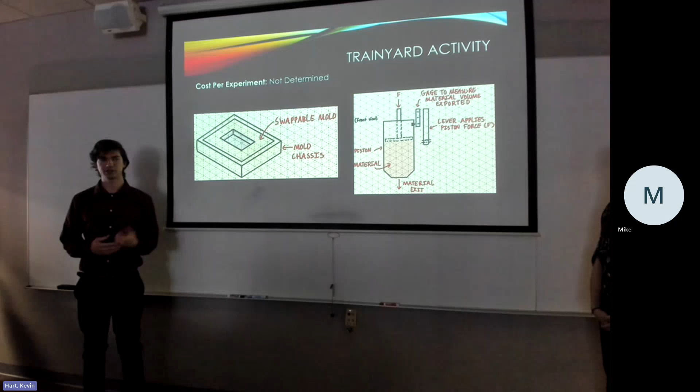One more back. The cost for the experiment was not determined because it was eliminated very quickly. This design has very low design freedom, and they also have an activity already that comes...

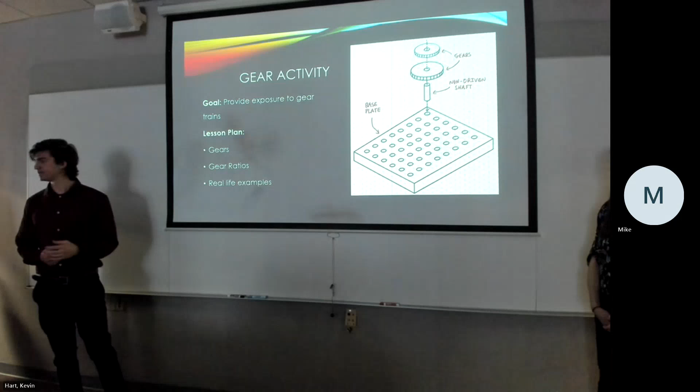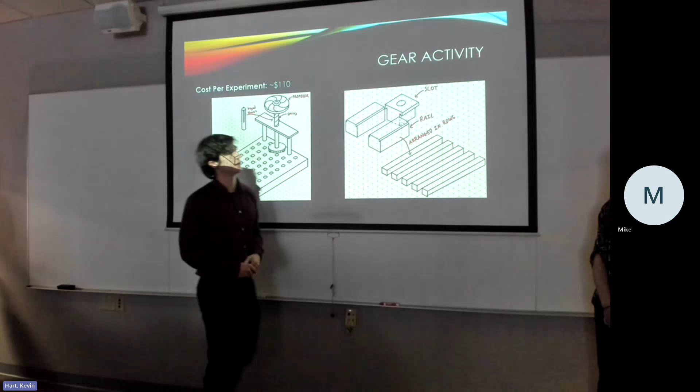The cost for this experiment was pretty high. We wanted to have 5 of them, and it was about $110 each. This cost is so high because of the plastic gears and metal gears. They're both pretty expensive if you want to get large ones that are easy to work with.

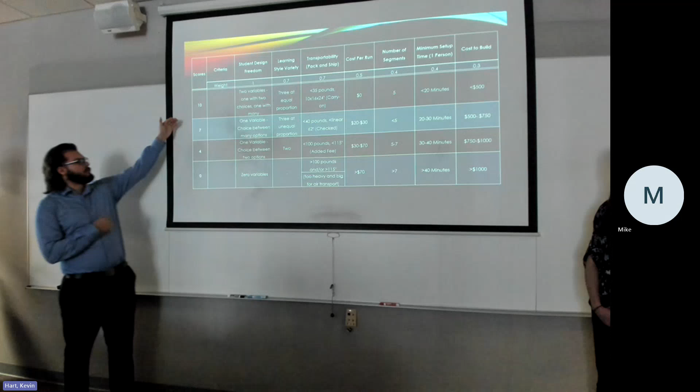The process that we used to decide which of those designs we would develop further was by developing our criteria table, which lists out all 7 of our criteria along with their associated weight, and this table enabled us to score each activity on a 1 to 10 scale.

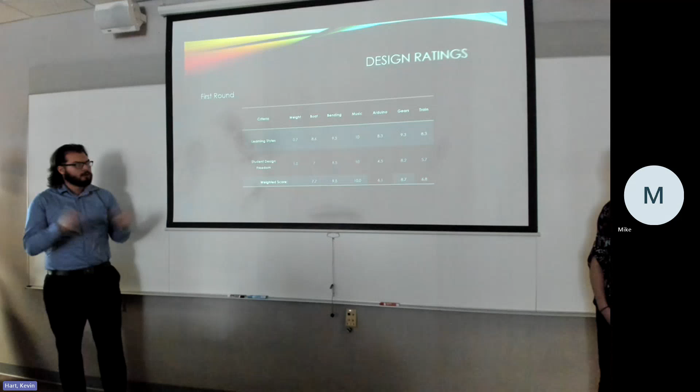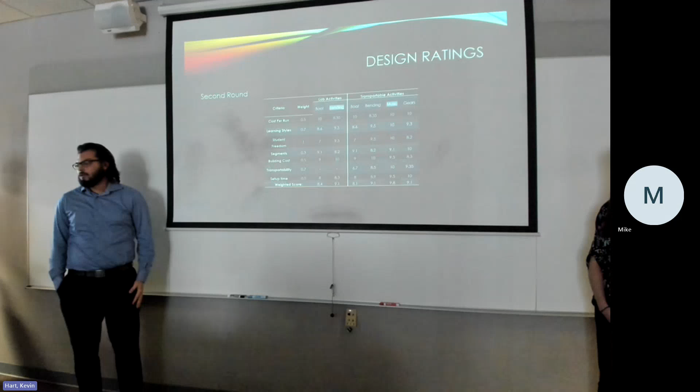So we split up the process into 2 rounds. The first round was designed to eliminate 2 activities that we believed didn't have potential to become final contenders. The second round was a lot more in detail across all 7 criteria. So for our first round, we only considered our 2 most important criteria, being learning styles and student design freedom. Based on these 2 criteria, the Arduino and train yard activity were eliminated due to having a very low student design freedom. And for our second round, it was a lot more in detail across all 7 criteria.

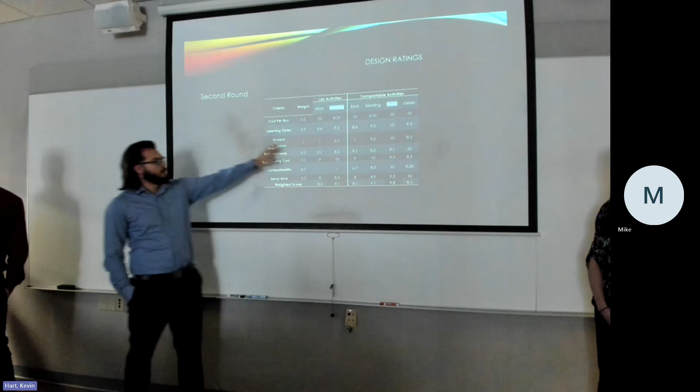So our boat and bending activities were split up into a lab version as well as a transportable version. With the lab activities, the bending activity ended up having the highest criteria score at 9.1. And for our transportable activity, the music activity won at 9.8.

So for our steps going forward on the design path, we want to finish our designs within the first 3 weeks of coming back from break. So we want to order some parts, do a prototype run, make sure it works, test it, revise the design, and order the rest of the parts and assemble it. On the bottom side, we want to do some lesson planning in the first 3 weeks in tandem with designing the finished product. We want to practice the lesson and then revise it and repeat that as many times as we need to make it perfect.

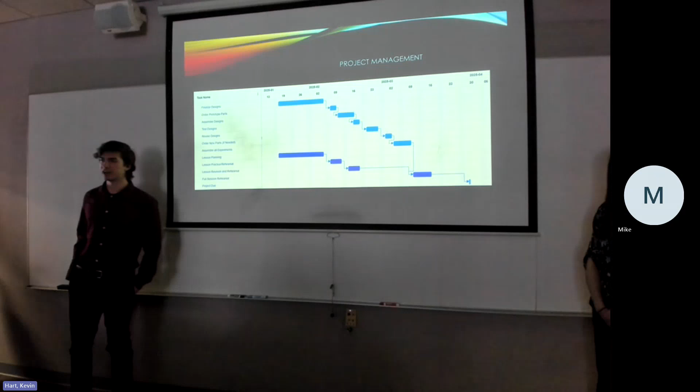Finally, we want to do a full session rehearsal, the entire thing, including the test apparatus, and that should be due by the 1st. So we have a bit of room to work with at the end there, about a week and a half; it'll probably get eaten up by waiting for parts.

Okay, got a couple minutes for questions. Start with committee first. Sure, you're chomping at the bit. You guys were only a few slides away from having one of the best formatted slide decks that I've seen in years. The tables were too much. You talk about cognitive load, those tables, all the groups put them up, and your mind goes numb. So fix those slides and your deck looked great. There were a few other slides that maybe had a few different words, but it was good. I think it's actually hard.

Yeah, I got a couple. So the bending lab. So first off, you had these 6 that you were considering, yes? And you are for sure going with the bending and the music? Yeah, as of right now, those are the ones that we have decided. Okay. So I thought it was a little unusual that you spent 5 or so minutes talking about the ideas that you're not going to use, but okay.

So you're going to do this experiment in S214. Is that the idea? You're going to hook it up to those frames? All right, and so you want them to come away with what concepts? I think you mentioned yield. Yeah, some yield strength or flexural strength. Right. So wood, I don't know if it's the best choice for demonstrating yield, right? Wood can be brittle in some ways, so I just caution you about the material choice for that experiment if you're trying to teach yield as a concept. Right, okay. So that's that one.